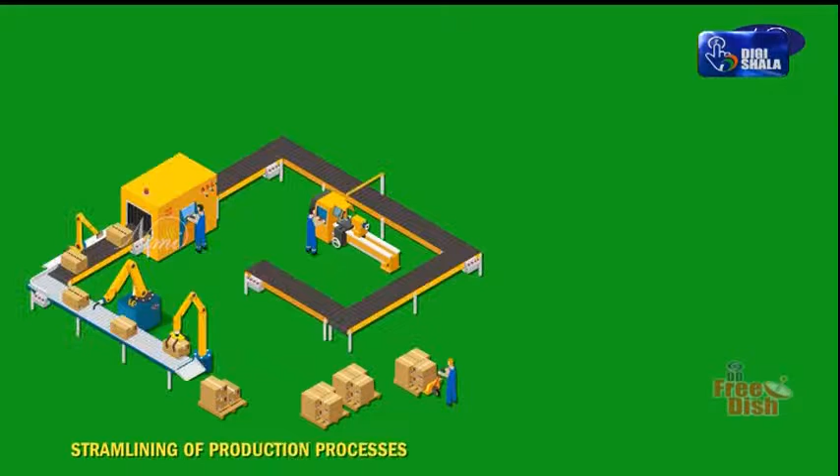Advantages of BIS ISI certification marks scheme. The BIS gives more advantages to manufacturers: streamlining of production process and introduction of quality control system, independent audit of quality control system by BIS, and reaping of production economies accruing from standardization.

Next, it exposes a better image of the product in the market, both internal and overseas. Lastly, it eases winning the confidence and goodwill of wholesalers, retailers, stockists and consumers on the manufacturer.

The preference for ISI marked products by organized purchasers, agencies of central and state governments, local bodies, public and private sector undertakings, etc. Some organized purchasers offer even higher prices for ISI marked goods. Financial incentives are offered by the Industrial Development Bank of India, IDBI and nationalized banks may lend help to the manufacturers.

Next, the advantages to consumers: conformity with Indian standards by an independent technical national organization. It helps in choosing a standard product, meaning the consumer can easily choose a standard product. There is free replacement of ISI marked products in case they are found not to be of standard quality.

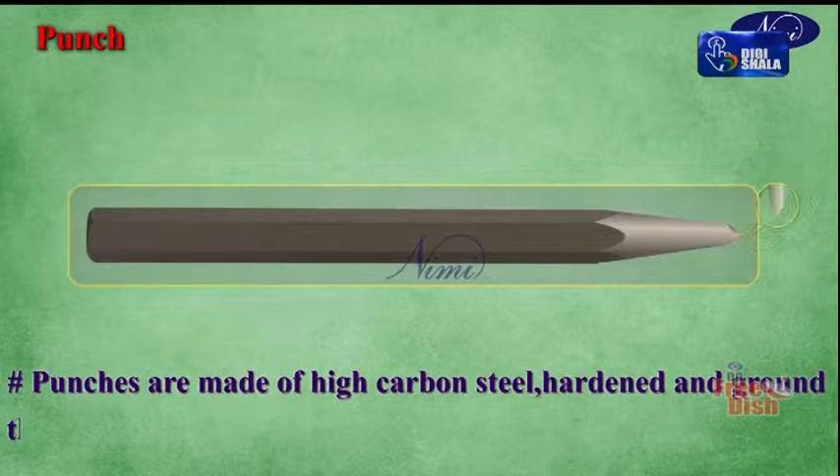Number three, point: this portion of the part makes the line permanent. Punches are generally about 100 mm to 150 mm in length and the diameters are 4 mm to 12 mm. Punches are made of high carbon steel, hardened and ground to the point angle according to the operation.

Now we will discuss the types of punches: number one, center punch; number two, dot punch; number three, prick punch. Number one, center punch: the angle of the point is 90 degrees in a center punch.

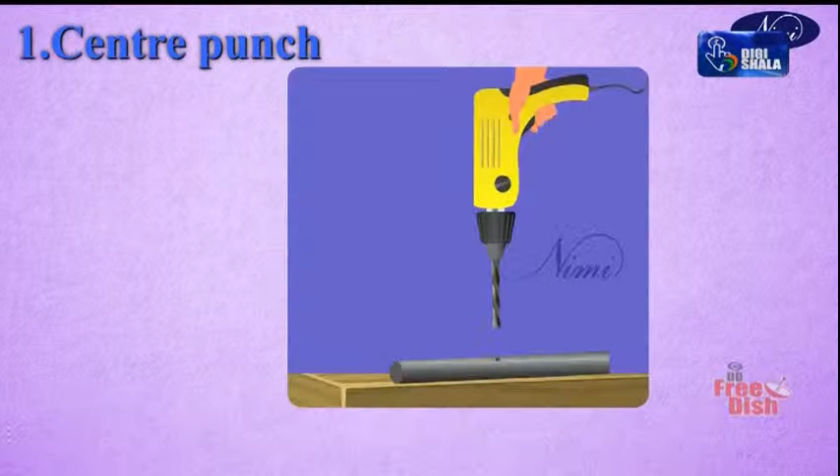The punch mark made by this is wide and not very deep. This punch is used for locating the center of holes. The wide punch mark gives good seating for starting the drill.

Number two, dot punch: this punch is similar to the center punch. The only difference is that it has a point angle of 60 degrees. The 60 degree punch is used for marking witness marks and is called a dot punch. The witness marks should not be too close to one another.

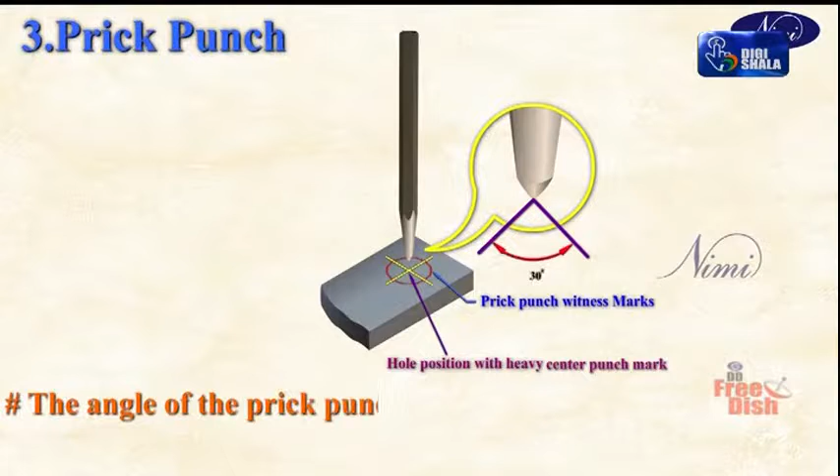Number three, prick punch: the angle of the prick punch is 30 degrees. The 30 degree point punch is used for making light punch marks and is needed to position dividers.

I hope you all understand the types of punches and their uses. Thank you.

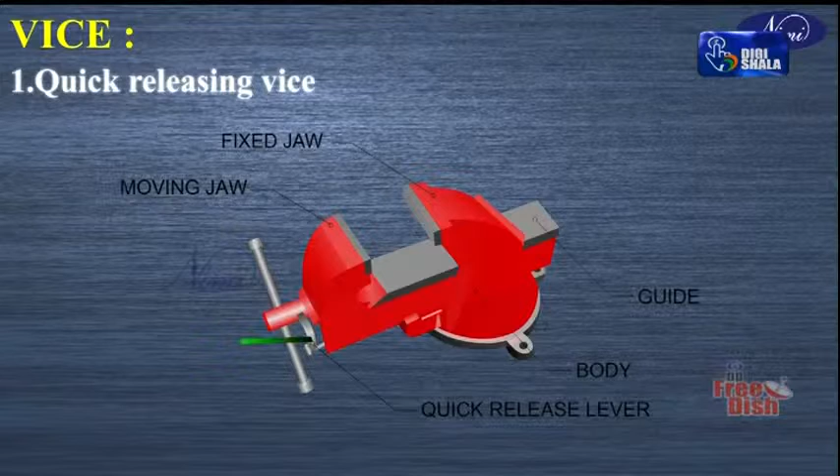Let us see one by one. Number 1, quick releasing vice. A quick releasing vice is similar to an ordinary bench vice, but the opening of the movable jaw is done using a trigger. There is an additional lever available for quick opening and closing. If the trigger at the front of the movable jaw is pressed, the nut disengages the screw and the movable jaw can be set in the desired place quickly. This is the main advantage of the quick releasing vice - we can open or close the vice very quickly.

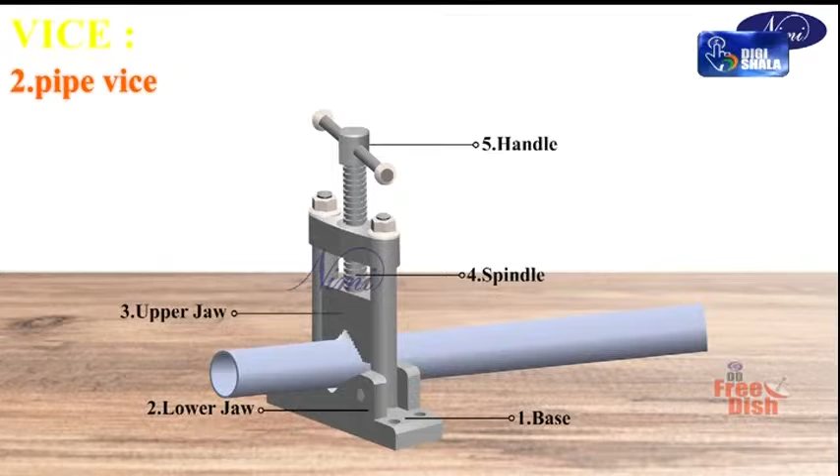Number 2, pipe vice. Pipe vice has V grooves of 90 degrees for holding round sections of metals such as tubes and pipes. In this vice, the screw is vertical and the movable jaw works vertically. The pipe vice grips the work at 4 points on its surface. What are the major parts of pipe vice? Base, lower jaw, upper jaw, spindle, handle. So pipe vice is mainly used for holding round sections of metals, tubes and pipes, etc. In this pipe vice there are different parts.

Now let us see them one by one. Base - a base which holds and supports all the parts and has 4 holes to clamp on the bench, so it can be placed wherever required. Lower jaw - this part is attached to the base in a fixed position, so the fixed lower jaw is attached to the base.

Number 3, upper jaw - this part is attached to the spindle. When we rotate the handle attached to the spindle, the upper jaw moves up and down. Number 4, spindle - the spindle moves up and down according to the direction of rotation. Now look at the diagram for the different parts - the V shape lower jaw and upper jaw are arranged so that a round section of metal can be easily clamped on this pipe vice.

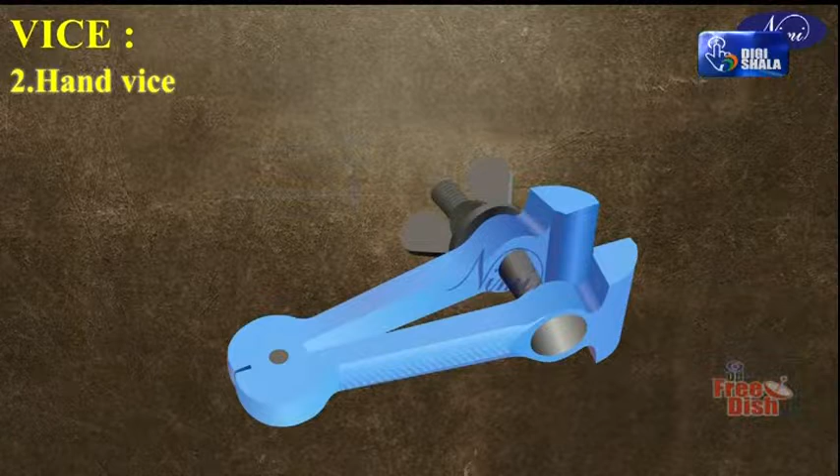Another one is the hand vice. Hand vice is used for gripping screws, rivets, keys, small drills and other similar objects which are too small to be conveniently held in the bench vice. Hand vice is made in various shapes and sizes. The length varies from 125 mm to 150 mm, and the jaw width from 40 to 44 mm. The jaws can be opened and closed using the wing nut on the screw that is fastened to one leg.

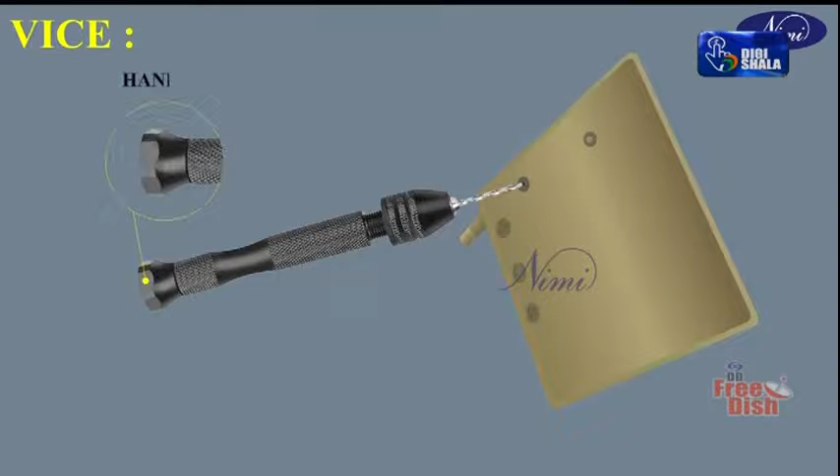Next one is pin vice. The pin vice is used for holding small diameter jobs. It consists of a handle and a small collet chuck at one end. The chuck carries a set of jaws which is operated by turning the handle.

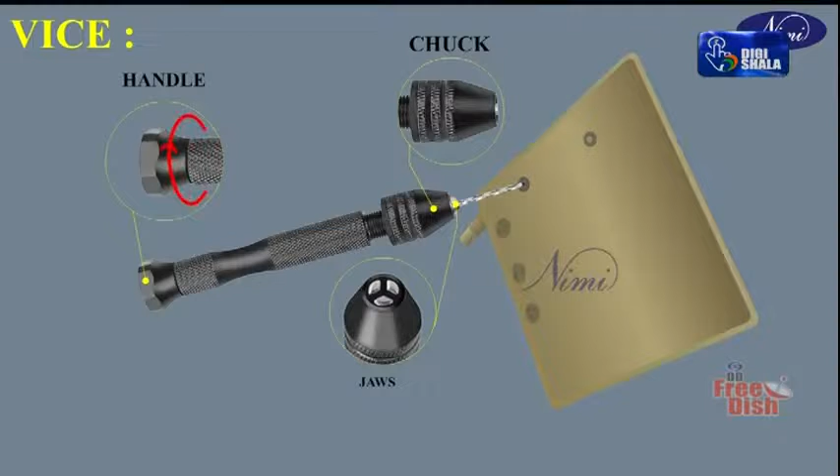Another one is the tool maker's vice. The tool maker's vice is used for holding small work which requires filing or drilling, and for marking small jobs on the surface. This vice is made of mild steel, and tool maker's vices are accurately machined.

The last one, leg vice. A leg vice is a holding device generally used in a forge shop for bending and forging work. For a forging shop, different operations are carried out there, which is mainly where the leg vice is used. It is made out of mild steel to avoid breakage while hammering, or sometimes out of wrought iron material.

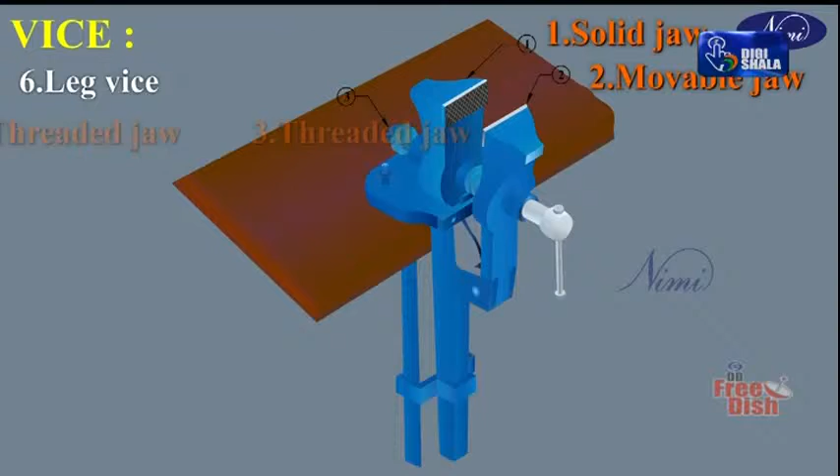What are the major parts of leg vice? Number 1, solid jaw. Number 2, movable jaw. Number 3, threaded jaw. Number 4, spindle. Number 5, spring. Number 6, pivot. Number 7, leg. Number 8, clamp. These are the different parts of the leg vice.

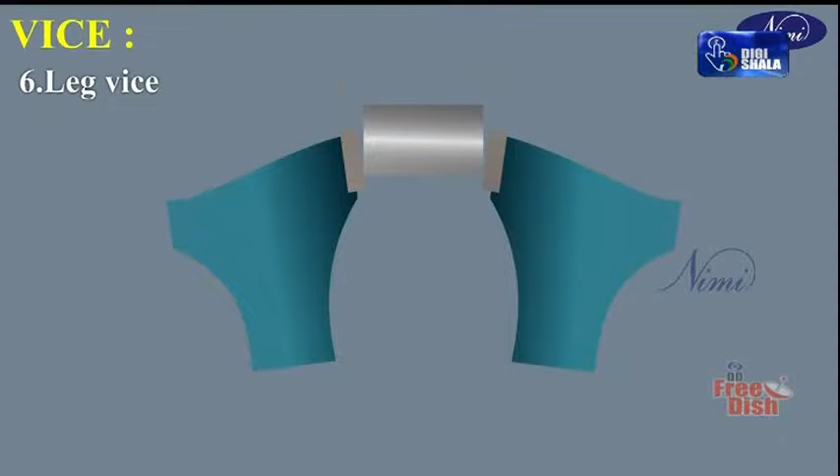Since the hinged jaw moves in a radial path, the job held in this vice is not gripped properly because of this line contact. Hence, work which can be carried out on a bench vice cannot be held in the leg vice. So jobs which only require hammering are held in the leg vice. The leg vice is mainly used in forging for different operations.

I hope you have all understood the types of vices and their applications. Thank you.

Arc welding. Type of weld: pipe butt weld. Type of joint: butt joint. Position: 1G horizontal position, rolling. Material: MS pipe. Now we will go into the details of how the pipe welding can be done in 1G position.

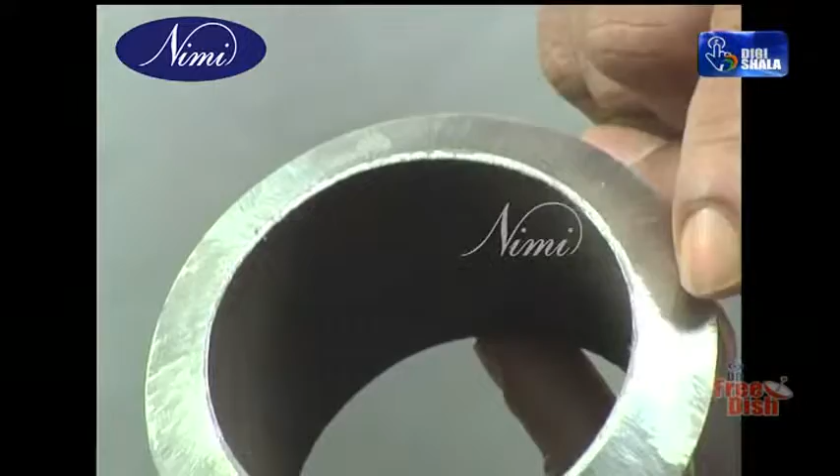Ends of the pipe are beveled 30 to 35 degrees. A root space of 1.5 mm to 2 mm is maintained. After beveling, the edges are well ground and filed. All dirt is removed. The pipe has to be tack welded in 4 positions.

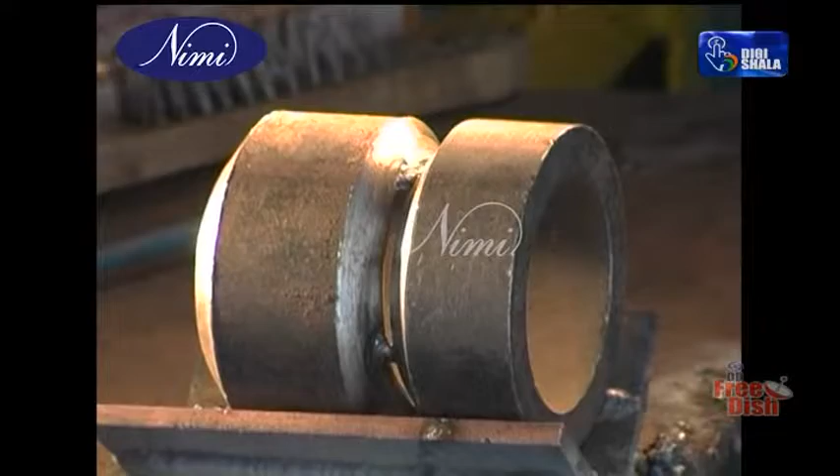After tack welding of the pipe, it is kept horizontally with the axis parallel to the welding table. Now you can start the welding with a 3.15 mm electrode and a current setting of 100 to 110 amperes.

Before you start the welding, you strike the arc on a separate plate to ensure that the arc is stable and uniform. The electrode makes an angle of 60 to 70 degrees with the line of welding, and 90 degrees with the plate surface. In this position, you can weld the pipe in the flat position by turning the pipe.

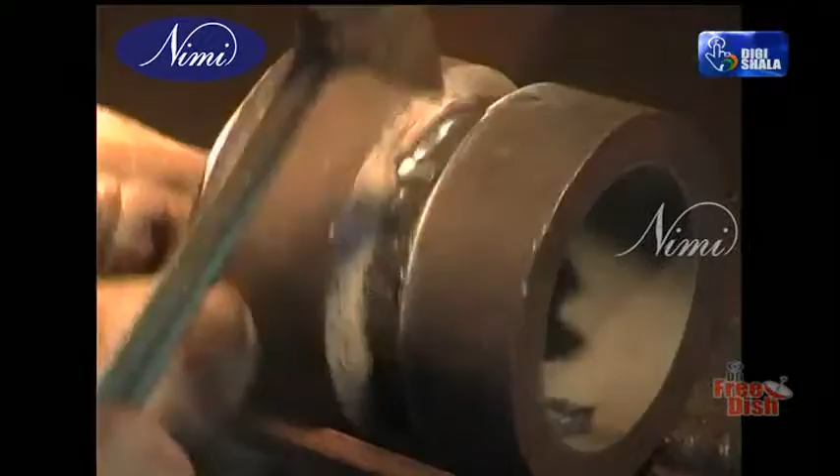After completion of the root run, the root is perfectly cleaned by deslagging with a chipping hammer and applying a wire brush for perfect cleaning. Once the cleaning is complete, you can have the first run and the second run. As for the root run, use a 3.15 mm electrode with a current setting of 100 to 110 amperes.

Once the welding is completed, clean the weld surface using a chipping hammer, wire brush it, and inspect for any welding defects. The bead of the weld should be very uniform. Reinforcement should also be uniform.

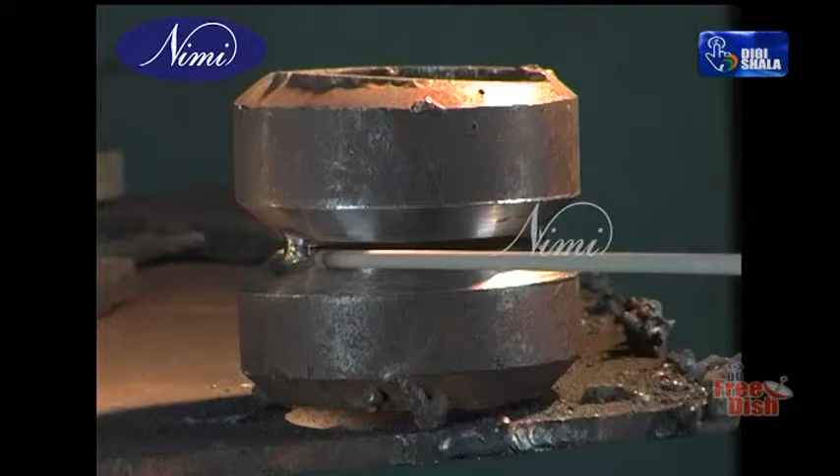Now we will go into the position of welding in the 2G position, that is the horizontal position. The axis of the pipe is vertical and the edges of the pipe are prepared as you have done for the 1G position. The tack welding is also done.

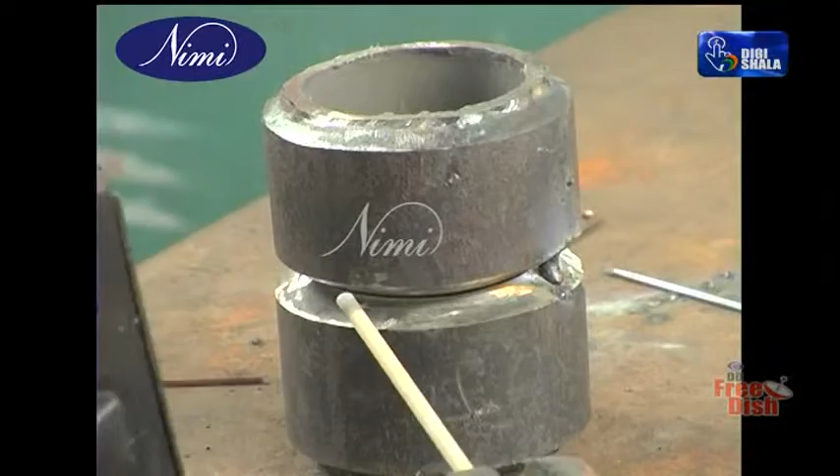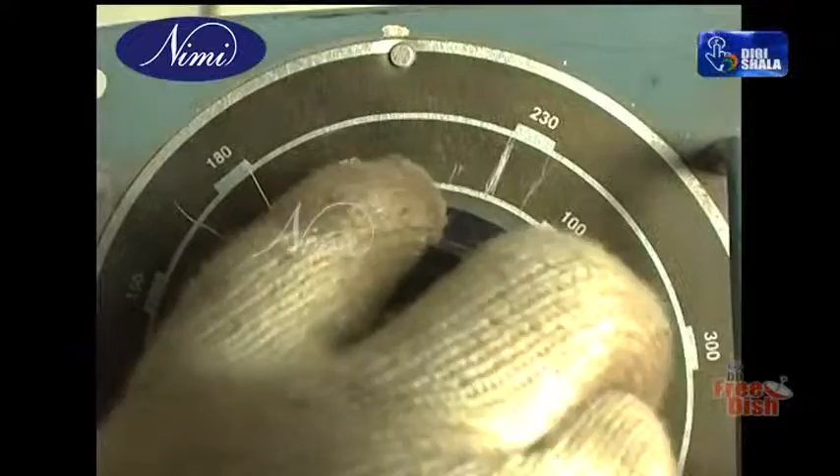Each tack weld can end with a keyhole. The current setting is as recommended by the manufacturer of the electrode. In general, it is 100 to 110 amperes for a 3.15 mm electrode.

After tack welding, the pipes are kept on the welding table or at a correct height convenient for your welding. The welding is done in a horizontal position all around the pipe. If you want, you can turn the pipe also.

After completion of the root run with a 3.15 mm electrode, the root is cleaned perfectly by deslagging and wire brushing. You can have the first run and second run using a 3.15 mm electrode.

Once you complete the welding, clean the welding by removing the slag and wire brush it, and inspect the welding for any type of defects.

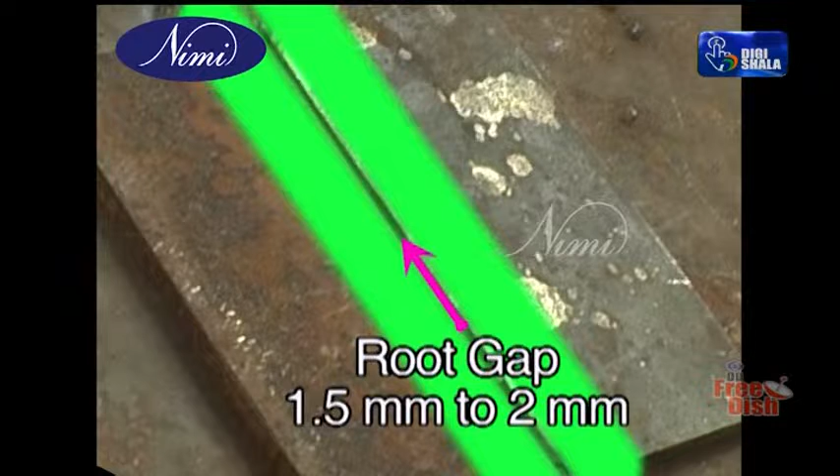Material: MS plate. The preparation of the plate is the same as you have done for the 1G position. After preparing, the plates are tack welded the same way as you have done for flat welding. A root gap can normally be provided; it should be 1.5 to 2 mm only. A distance piece can be used for this purpose before the tack weld is done.

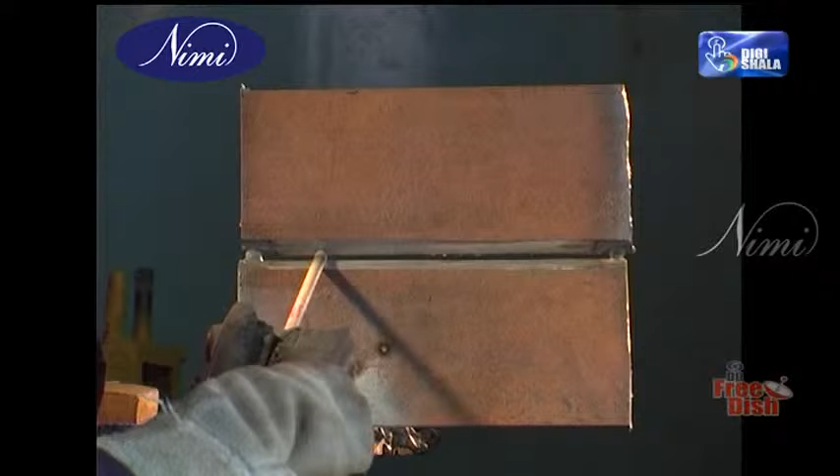The plates are kept on the table in such a way that the surfaces of the plates are vertical and the axis of the plate is horizontal.

As in the earlier cases, you can use a 3.15 mm electrode for tack welding as well as for the root run. The current setting is around 100 to 110 amperes and the welding is done from one end to the other end.

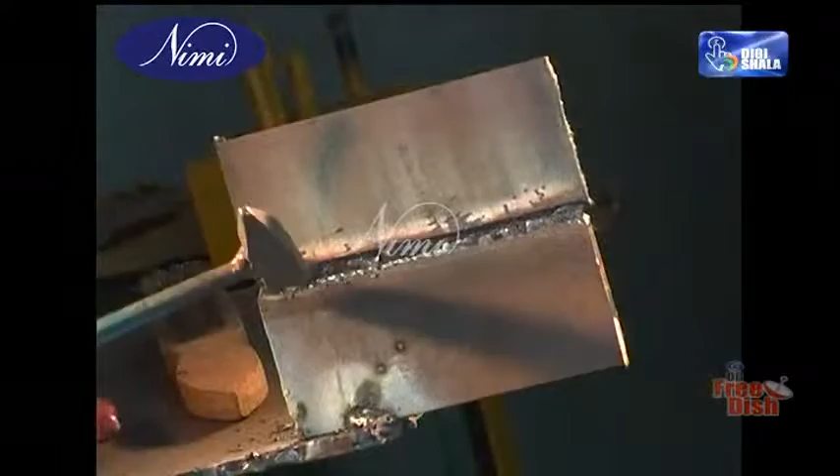After completion of the root run, the root is perfectly cleaned, all the slag removed by chipping hammer, then apply wire brush for perfectly cleaning the roots. This should be done before you have the first run and the second run.

Having completed the cleaning, you can use the same 3.15 mm electrode for the first run and the second run. After the first run, you have to clean the surface, that is, the weld surface should be cleaned perfectly.

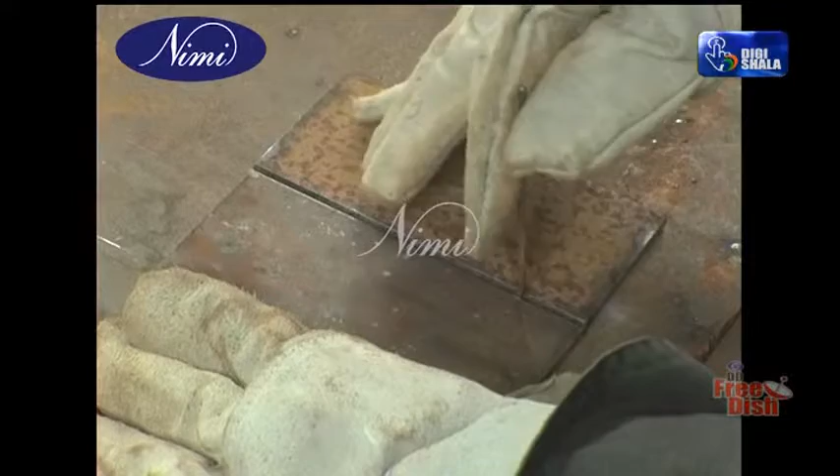Arc welding. Type of weld: groove weld. Position: 3G vertical position. Material: MS plate. Next is butt groove welding in the vertical position, that is 3G position. The preparation of the workpiece is the same way as in 1G and 2G position. After preparing the plates, tack welding is made as usual.

A root gap can normally be provided, it should be 1.5 to 2 mm only. A distance piece can be used for this purpose before the tack weld is done. You can use a 3.15 mm electrode for the root run.

After the tack weld has been done, the plates are kept vertical to the surface of the table and the axis is also vertical. Set the current 100 to 110 amps. We check the arc by striking on a separate plate whether the setting is okay or not. Start welding from bottom to top, that is uphill position. One thing to remind you, when doing vertical welding in an uphill position, starting from the bottom to the top, a slight change in current will be required.

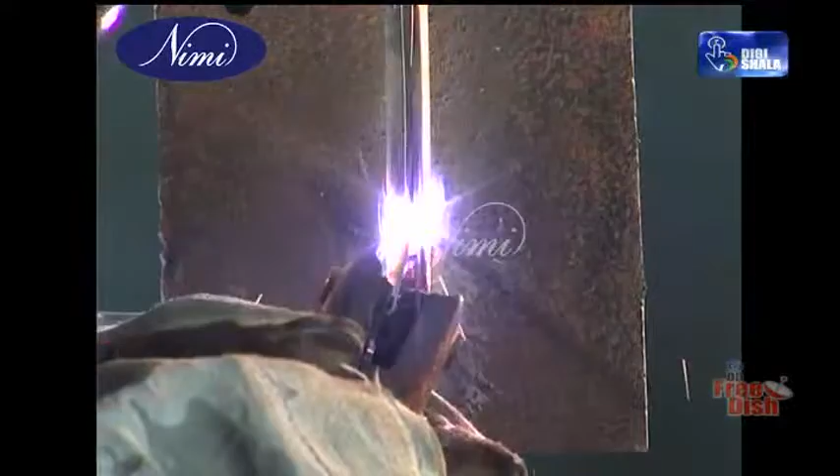Previously you have been welding at 100 to 110 amperes, but when doing vertical welding, you may set the current at reduced amperage, around 90 amperes. If required, reset the current and start the welding.

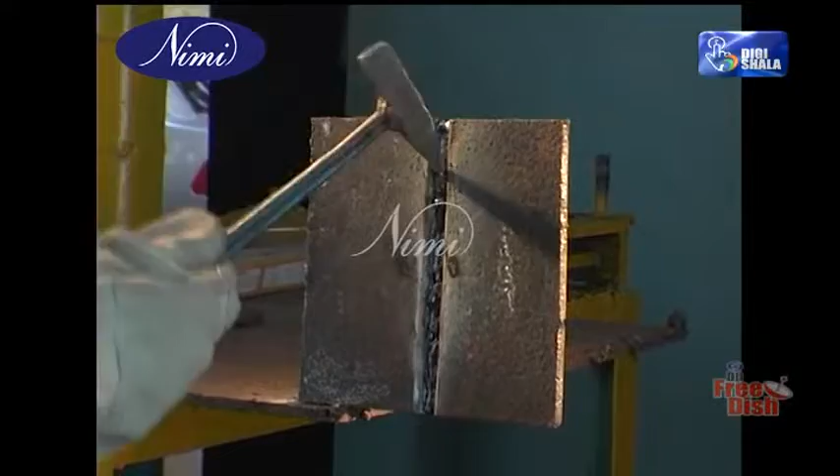Once you complete the welding, as done earlier, clean the root, de-slag completely, apply wire brush. Now you can have the first run.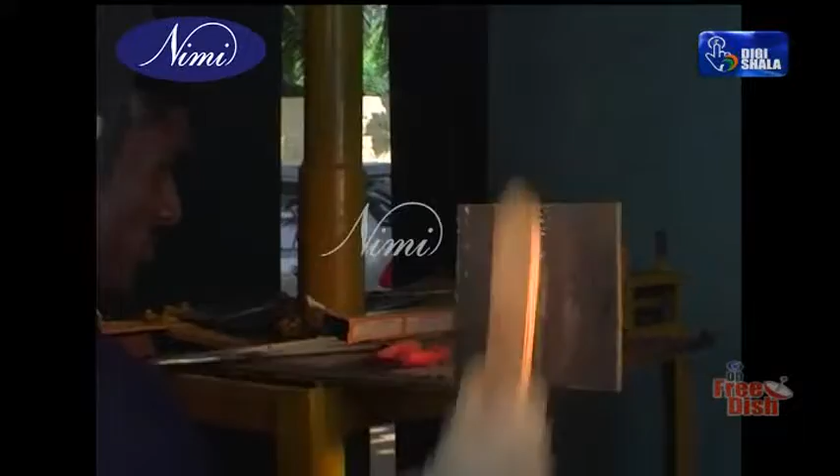After the first run, close the crater again. Clean the welding surface by deslagging and wire brushing, then have the second run. After completion of the second run, clean the surface by deslagging and wire brushing, and then check for any welding defects.

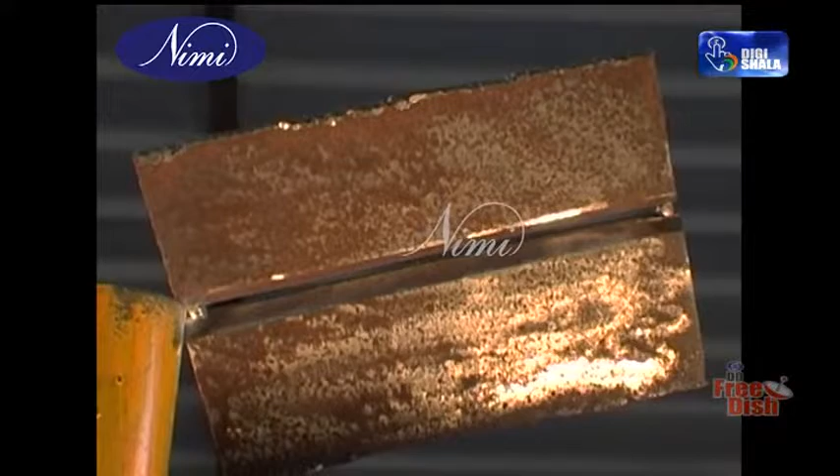Arc welding. Type of weld: groove weld. Position: 4G overhead position. Material: MS plate. Finally, we have to do the butt groove welding in 4G position, that is overhead position. Here the plates are kept parallel to the surface of the welding table in the overhead position. The axis is horizontal, and you are making the welding from the bottom.

The workpiece is prepared as we have done for the other examples. After preparation, they are tack welded using a 3.15 mm electrode. The root gap can be narrowly provided, it should be 1.5 to 2 mm only. A distance piece can be used for this purpose before the tack weld is done. You can use a 3.15 mm electrode for the root run.

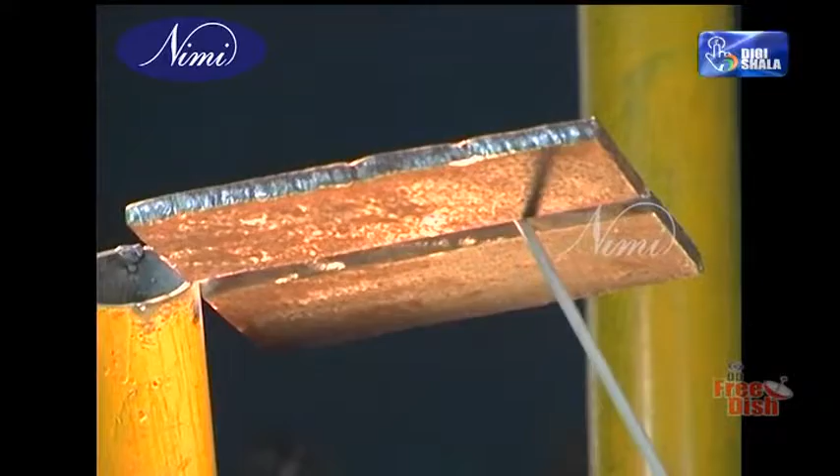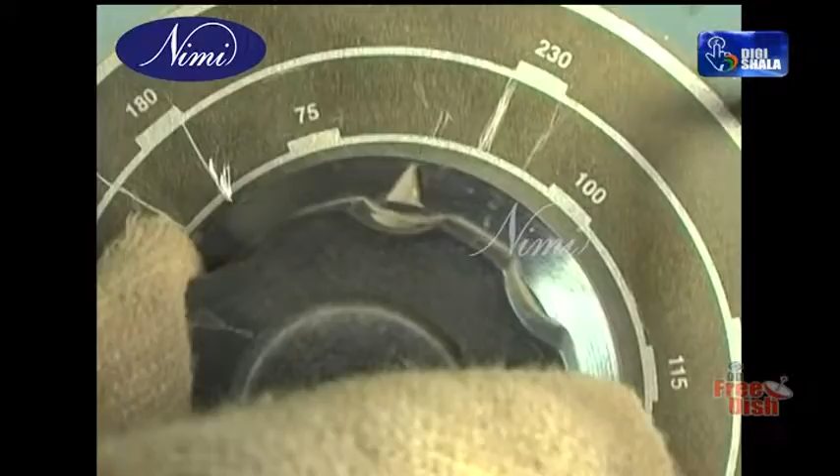The workpiece is then properly held in position so that you can conveniently weld from the bottom. Normally the required current setting is slightly less for overhead welding, around 90 amperes instead of 100 to 110 amperes for the 3.15 mm electrode. After setting the current properly, you start welding from one end to another, normally left to right.

Once you complete it, close the crater. Take 20 mm ahead, then start back. Then chip off all the slag, apply wire brush, and clean the root perfectly before the first run. Once the root run is completed, have the first run and second run.

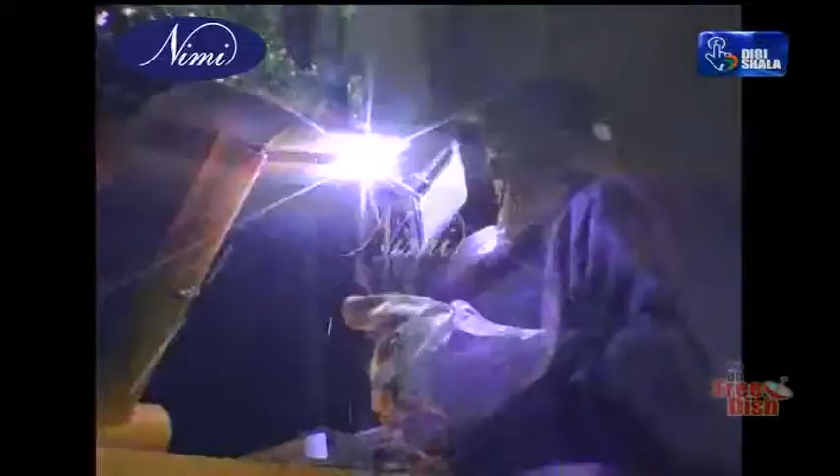Once the second run is completed, close the crater. Clean the surface perfectly and inspect for any welding defects.

Arc welding. Type of weld: pipe butt weld. Type of joint: butt joint. Position: 1G horizontal position, rolling. Material: MS pipe. Now we will go into the details of how pipe welding can be done in 1G position. Ends of the pipe are beveled 30 to 35 degrees.

A root gap of 1.5 mm to 2 mm is maintained. After beveling, the edges are well ground and filed. All dirt is removed. The pipe has to be tack welded in 4 positions.

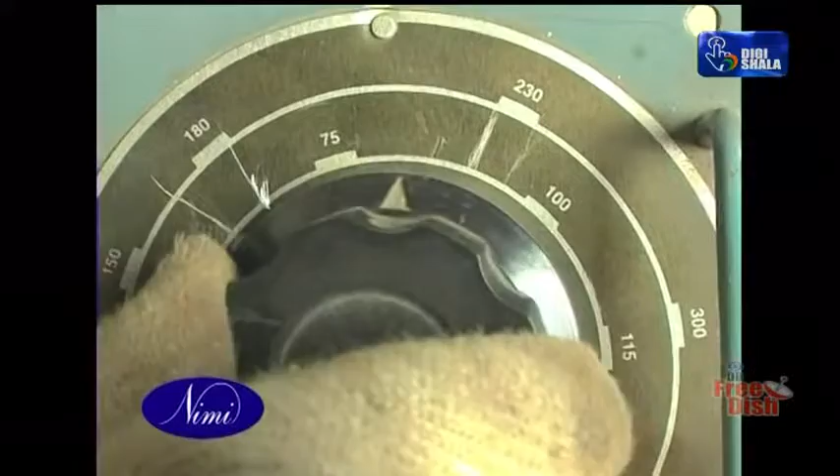After tack welding of the pipe, it is kept horizontally with the axis parallel to the welding table. Now you can start welding with a 3.15 mm electrode and a current setting of 100 to 110 amperes. Before you start welding, you strike the arc on a separate plate to ensure that the arc is stable and uniform.

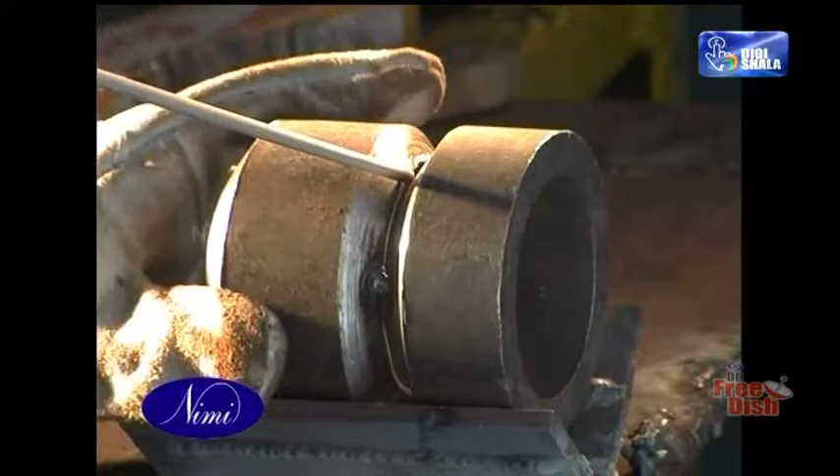The electrode makes an angle of 60 to 70 degrees with the line of welding and is 90 degrees with the plate surface. In this position, you can weld the pipe in the flat position by turning the pipe.

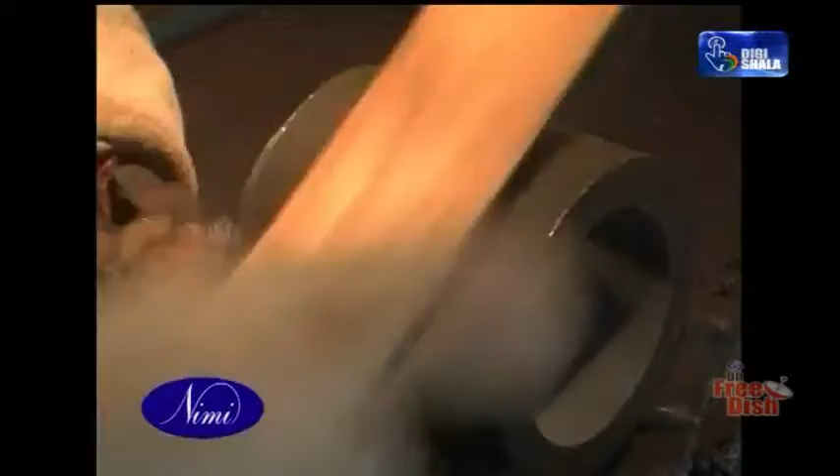After completion of the root run, the root is perfectly cleaned by deslagging with a chipping hammer and applying a wire brush for perfect cleaning. Once cleaning is complete, you can have the first run and the second run. As for the root run, use a 3.15 mm electrode with a current setting of 100 to 110 amperes.

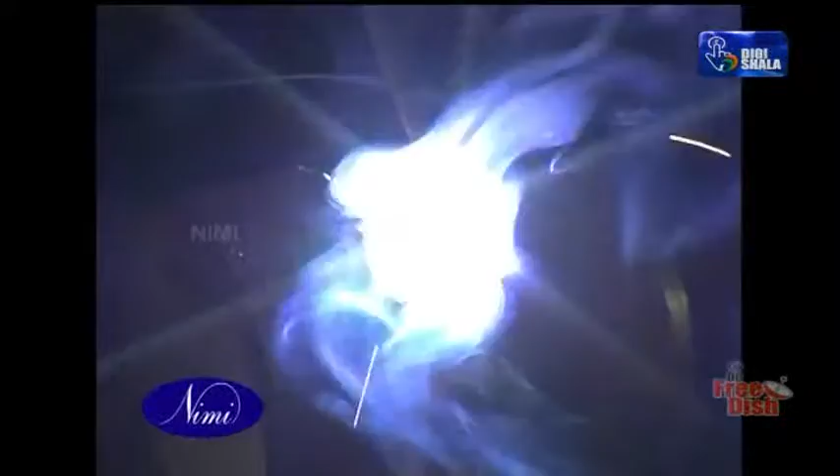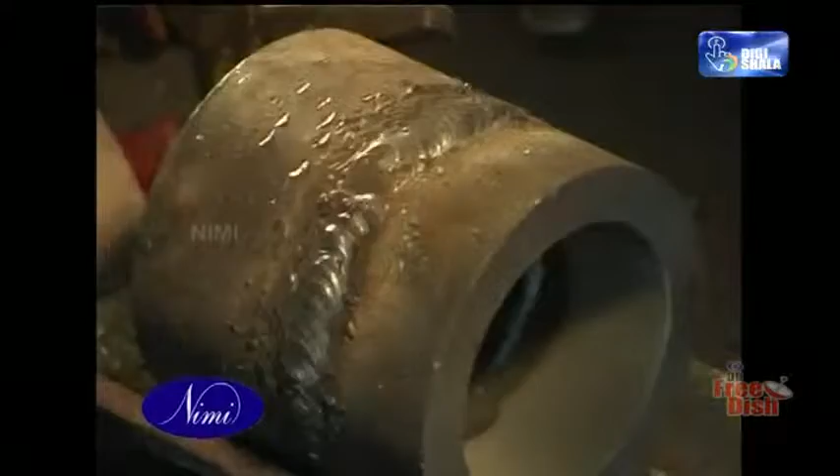Once the welding is completed, clean the weld surface using a chipping hammer, wire brush it and inspect for any welding defects. The bead of the weld should be very uniform. Reinforcement should also be uniform.

Arc welding. Type of weld, pipe butt weld. Type of joint, butt joint. Position, 5G horizontal position, fixed. Material, MS pipe. Here the pipe is horizontal but cannot be rotated.

In 1G position, we have seen that the pipe can be turned and the welding is always done in the flat position. Whereas in this case, the pipe cannot be turned and the welder has to go around the pipe and weld.

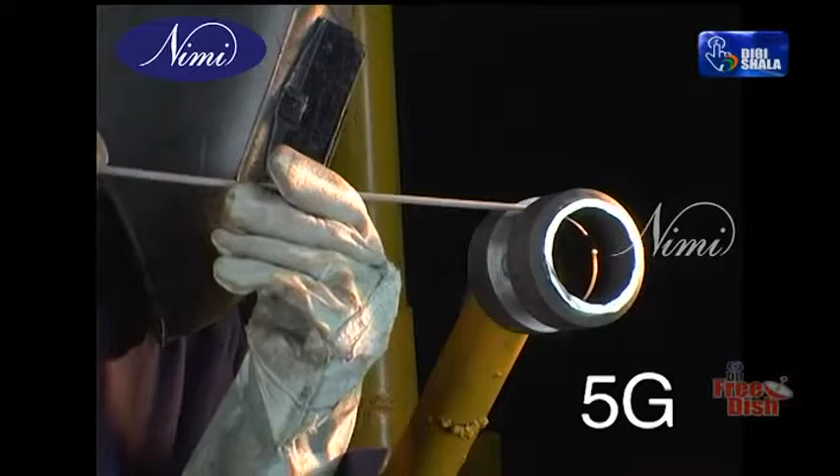The welding can be done in different methods. One, in the downhill method. Assume that the circumference of the pipe is divided into 12 hours. You can start from 12 and come to 6 in the right hand position. Again, you can start from 12 and come to 6 in the left hand position. For the right hand position, you weld in the clockwise direction, and for the left hand position, you weld in the anti-clockwise direction, both starting from 12.

The second method is the uphill position, in which you start welding from 6 and go to 12 in the anti-clockwise direction in the right half. Similarly, you start from 6 and go to 12 in the clockwise direction in the left half.

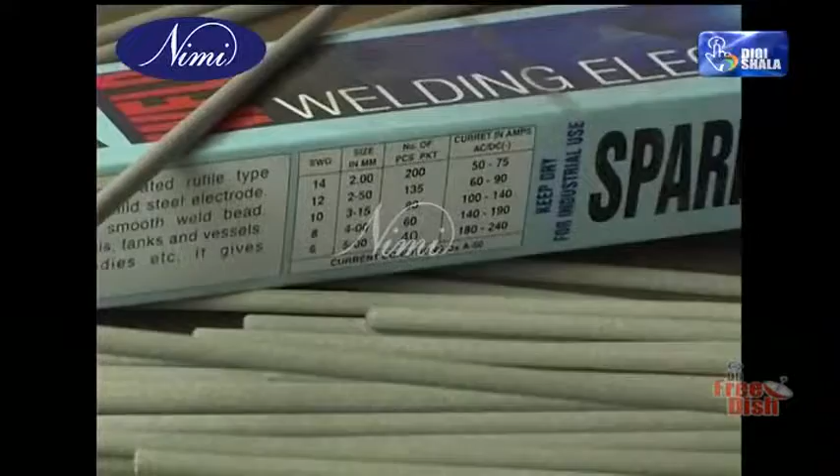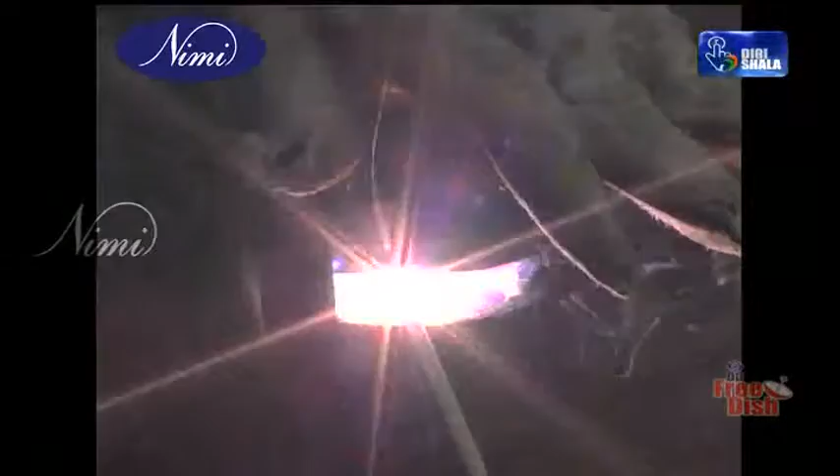The preparation of the pipe is similar to what has been explained in the other position. Then tack welding is done using 3.15 mm electrode. Four tacks are normally done after the pipe is kept in the horizontal position, so that you can go around without any difficulty.

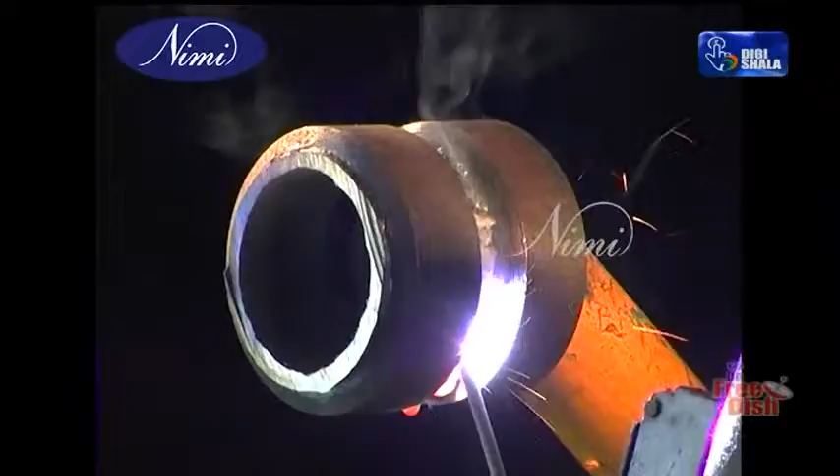Once the root run is completed, clean the root perfectly using chipping hammer and apply a wire brush. Then have the first run and the second run. After each run, you have to clean the surface before the next run.

After completion of the weld, clean the weld surface and inspect for any defects.

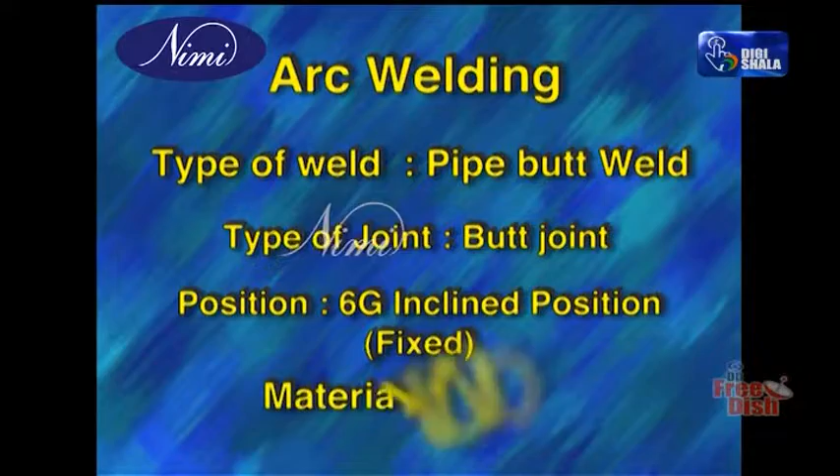After beveling, the edges are well ground and filed. All dirt are removed. Then the tack welding is done. The tack welding will be ending with a keyhole.

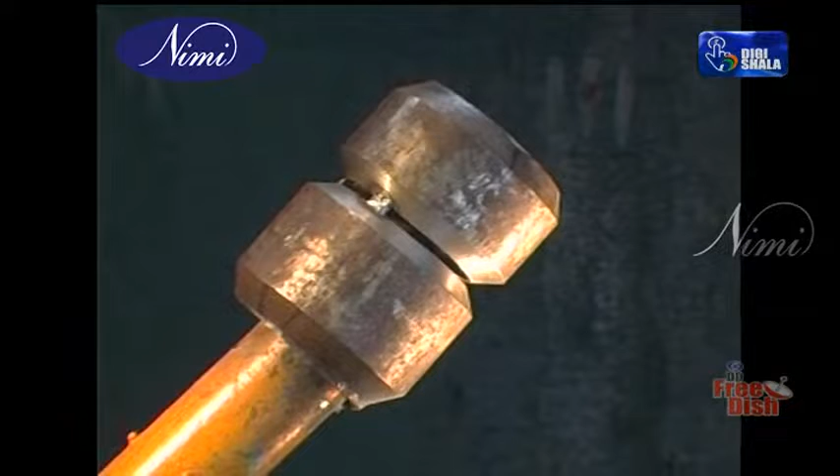After the tack welding is completed, the pipe is fixed in such a way the axis of the pipe will be maintained at an angle of 45 plus or minus 5 degrees and the pipe is fixed. You cannot rotate the pipe. The welder has to go around the pipe and weld.

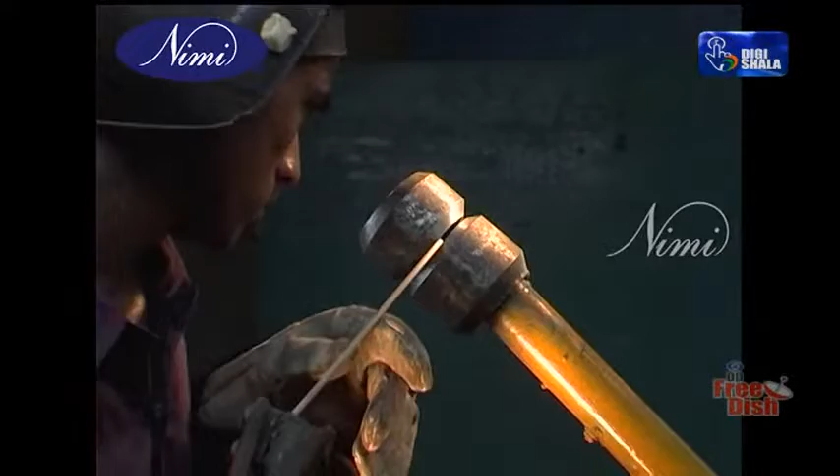You can use 3.15 mm electrode for the root run with a current setting of 100 to 110 amperes. The method of welding is as I explained for the 5G position. Either the uphill position or the downhill position can be used.

Once the root run is completed, clean the root using a chipping hammer and deslag it and apply a wire brush. Then have the second run and the third run.

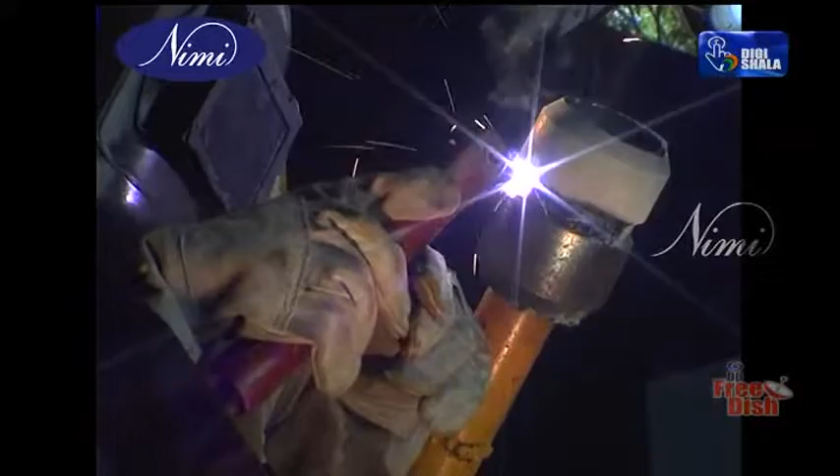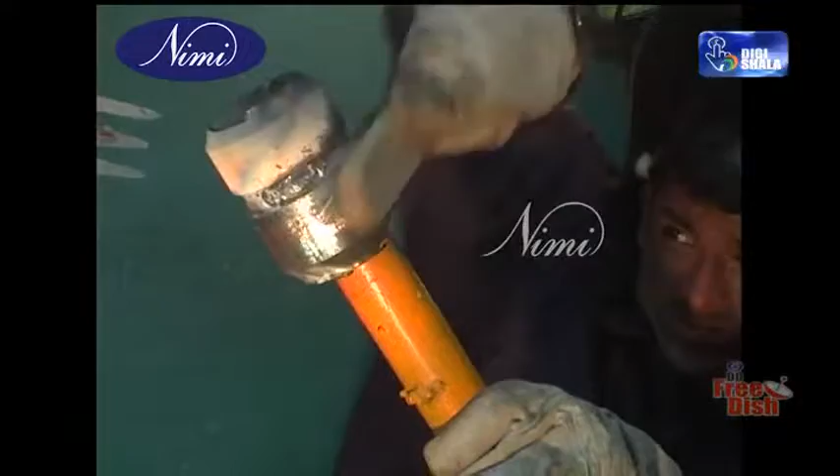Once the welding is completed, clean the surface of the weld after each run by deslagging and wire brushing. At the end of the weld, inspect for any welding defects.

So far we have done all the exercises in manual arc welding. Now we will do the exercises in TIG welding.

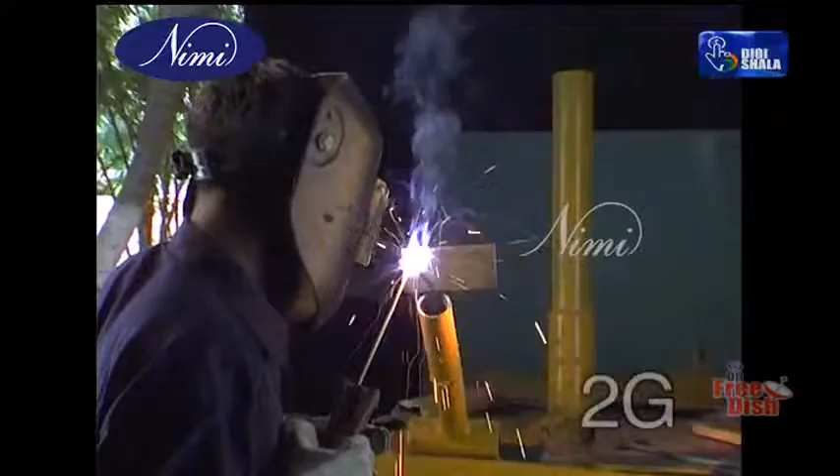Once you reach the extreme end, that is the finishing end, the crater has to be finished. So you take at least 20 mm ahead of this welding and again start back. Once you finish this welding, check for correct bead height and correct bead width.

After the horizontal welding, you can repeat this in the other two positions, vertical position as well as the overhead position, that is 4G.

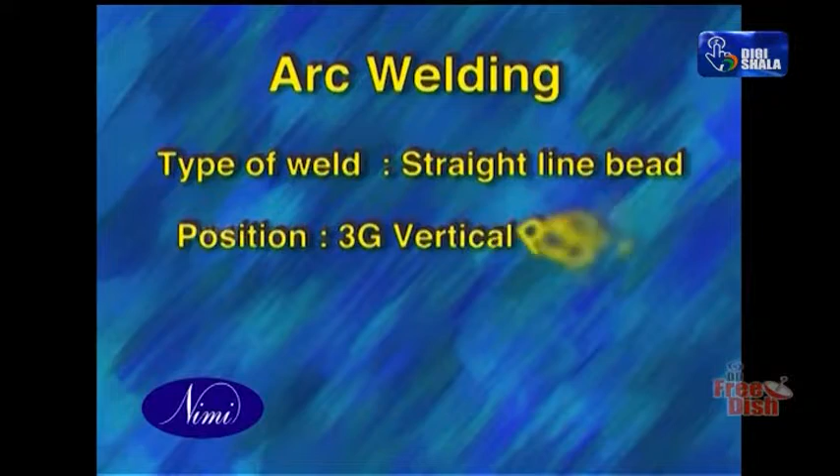Arc welding. Type of weld: straight line bead. Position: 3G vertical position. Material: MS plate.

Arc welding. Type of weld: straight line bead. Position: 4G overhead position. Material: MS plate.

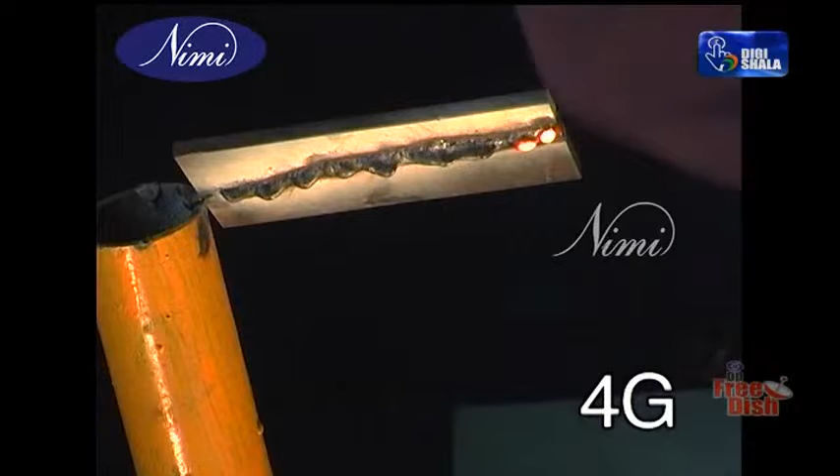We have already learned how to run straight line beads on flat plates in all 4 positions.

In this chapter, we will learn about butt welding for pipe butt joints using arc welding and TIG welding methods. Arc welding is a process by which a coated electrode is used to strike an arc between the electrode and the base metal. The heat generated in the arc is used to melt the base metal, and the electrode is melted and passed on to the weld pool as deposited metal.

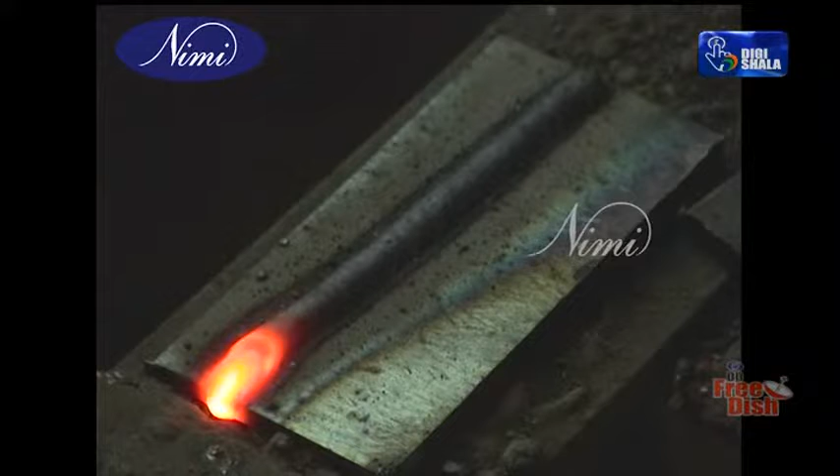The gas generated while burning the electrode is used to protect the arc, and the slag formed on the welding pool is used to protect the weld pool from atmospheric air to avoid any contamination.